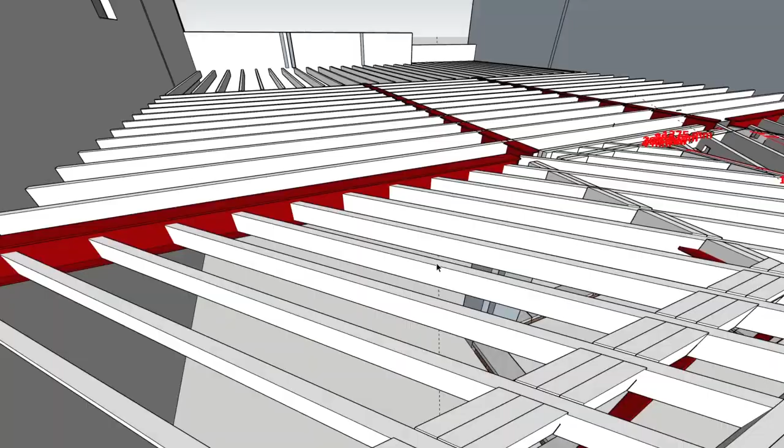I'll try and get to it, but essentially you can see this section in the middle, there's nothing in there, so the whole thing was self-supporting, and the projection here was about 3 meters and the distance here was 3 meters, so this was effectively a cantilever, and the strength of the joist here and here with this section, it was all supposed to tie in and hold itself together.

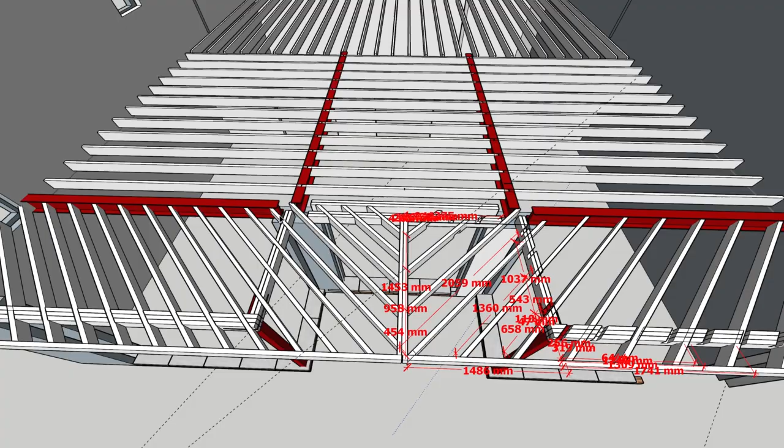This was the rear elevation of the house that's sitting on top to give us some weight there for the cantilever. But what made it more challenging was this section here. So the joists being set to 45 was complicated enough, but certainly at this detail here at the steel, you know, it's just a bevel at the back of the board.

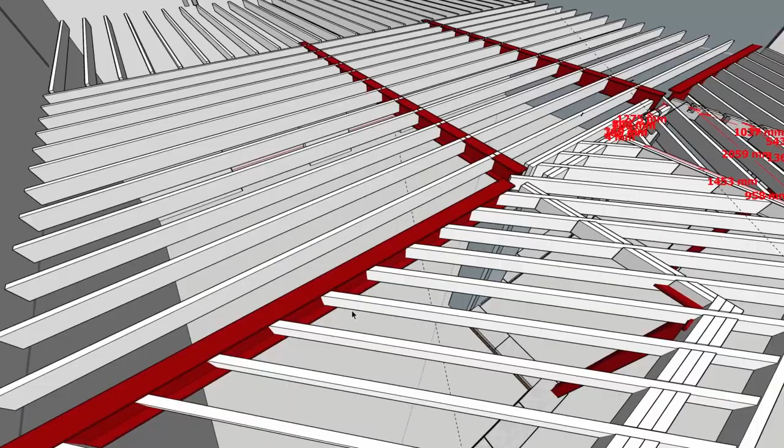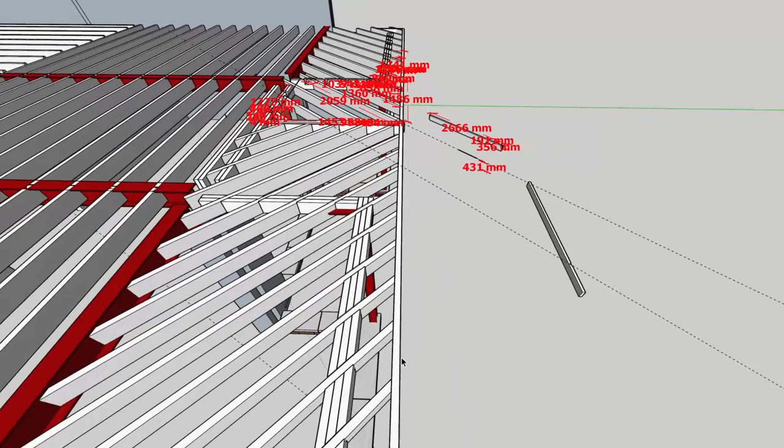But if you look at a normal steel, obviously timber can't run through the steel because there's a web. And these were originally going to be steel, but this section here was, you can see it's quite small, so there was only going to be a small piece of meat sitting in the steel, and this cantilever inherently wasn't particularly strong. Now, it probably would have been okay for this section, but obviously the further we come out,

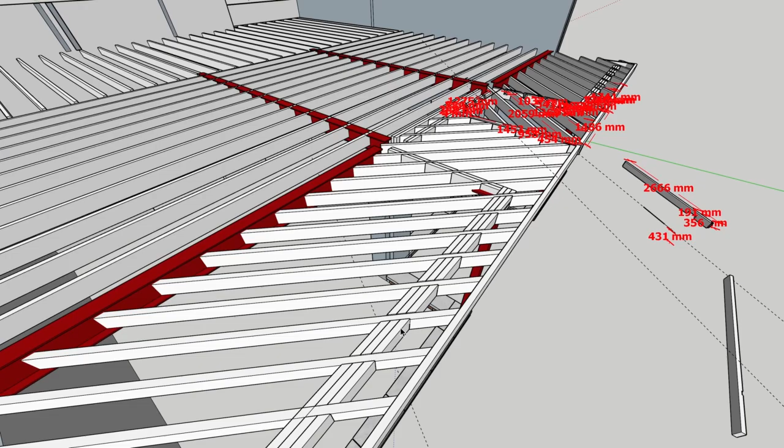especially to the middle, the weight of all of that timber here is incredible. If we just had a small cantilever, it wasn't going to work. So the structural engineer didn't even bother drawing and calculating for this. So we changed these to timber lintels, and that allowed us to create all the joists in one piece. And we did that by, I'll show you here if I pull that out. So if I do this, here we go.

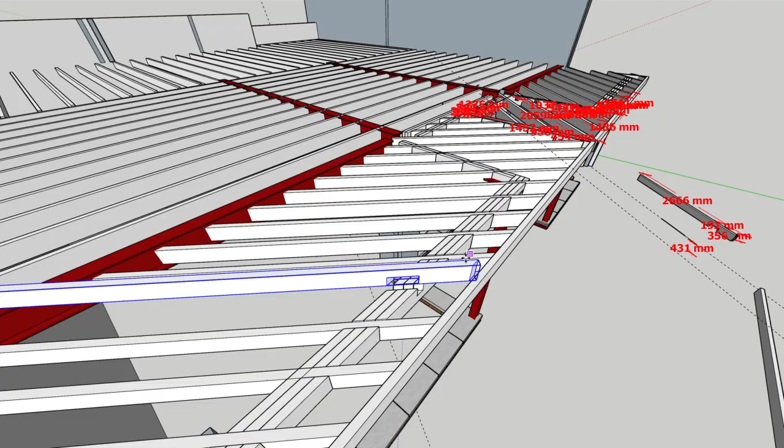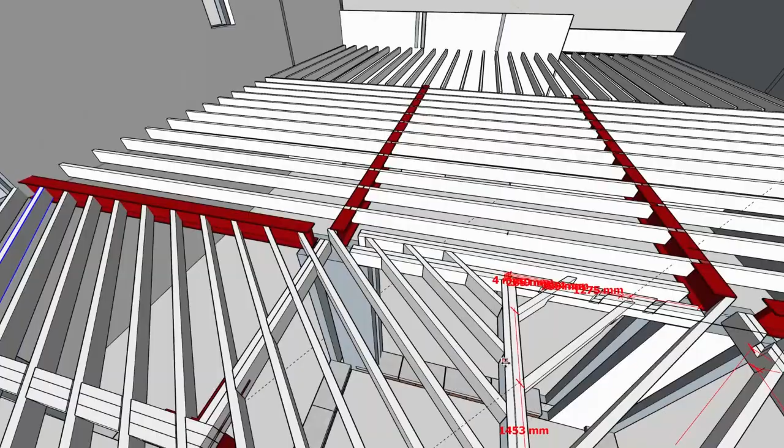And we basically did a half lap joint so that we could keep everything continual, glue it and screw it all together to get us that strength. Cutting half lap notches in the lintels at 45 degrees was a challenge. And there was supposed to be no visible means of fixing because all of this was just going to be stained and kept natural wood.

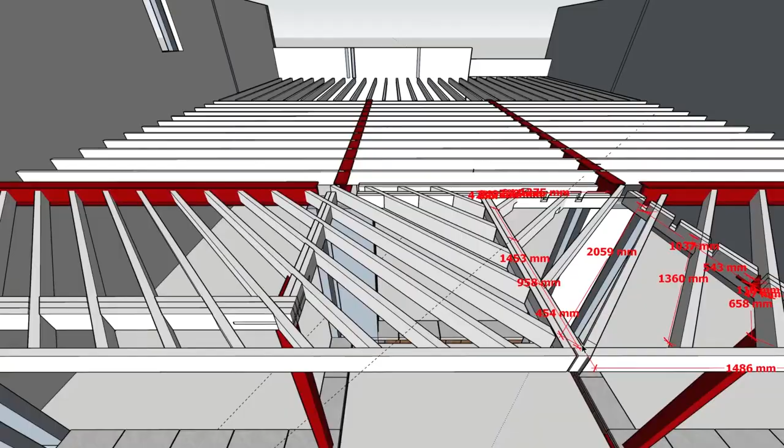So we had to use special invisible concealed joist hangers here and here. No fixings here. This was hidden between the steel and covered up, and we put 2 layers here, so all of the screws were covered and hidden. There are some videos of us assembling this on site.

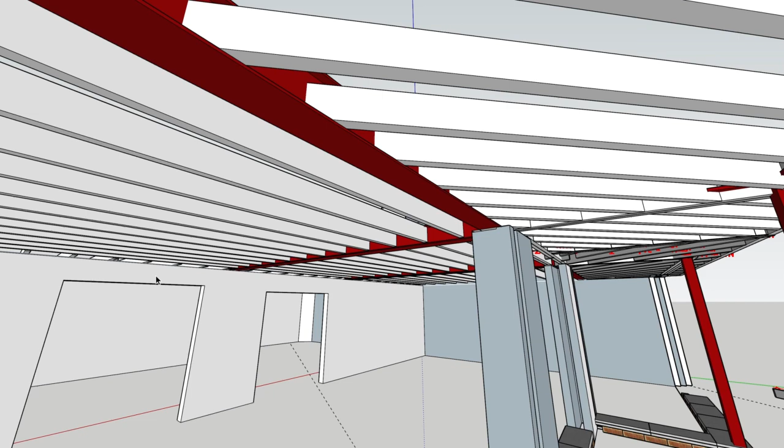But the whole reason for this detail was the architects wanted the external doors going all the way up to the ceiling. You'll see here that in a normal opening, there's a reveal of wall, and that's because you've got the load-bearing lintel here, and obviously that's covered by the wall finishes. In order to put the lintel in the ceiling, that's what complicated it. If the lintels had been below here, then obviously the timbers would have run through.

So the combination of all of those elements made this an incredibly complicated detail, but in the end we pulled it off and it looked quite spectacular. So that was the herringbone joists.